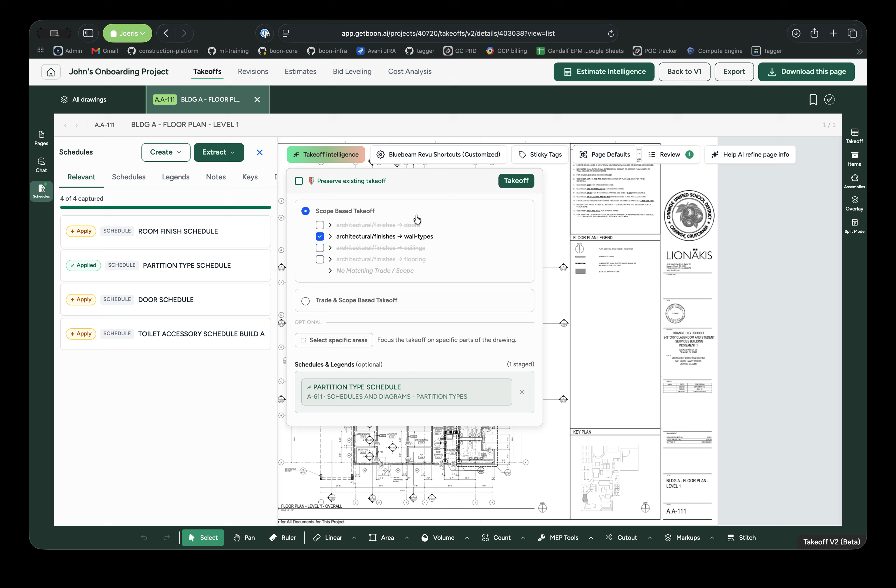Now in this beta mode, it is no longer needed for the user to draw the bounding box. That part is being automated away. So there is a note here, let AI find the wall label for you. They always have the option of drawing it if they want to do it the old way, but now they also have an AI assist.

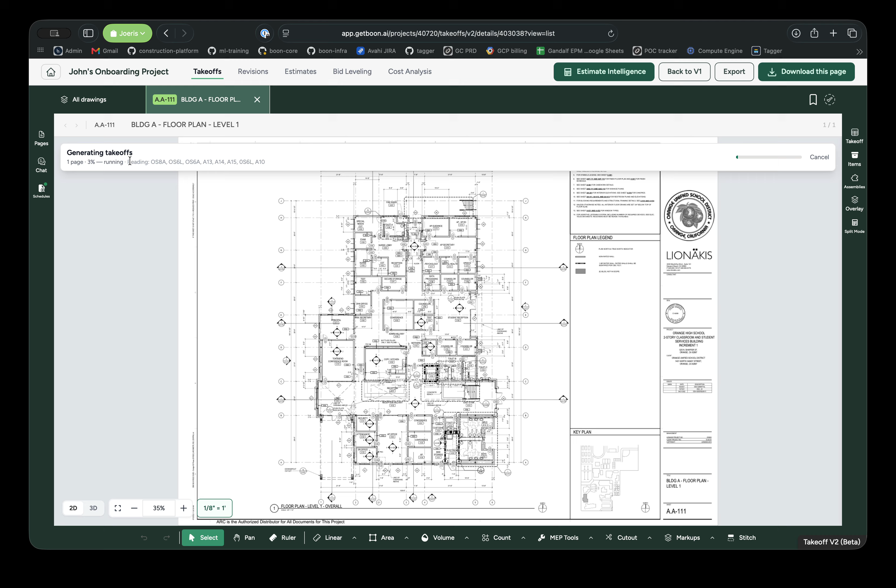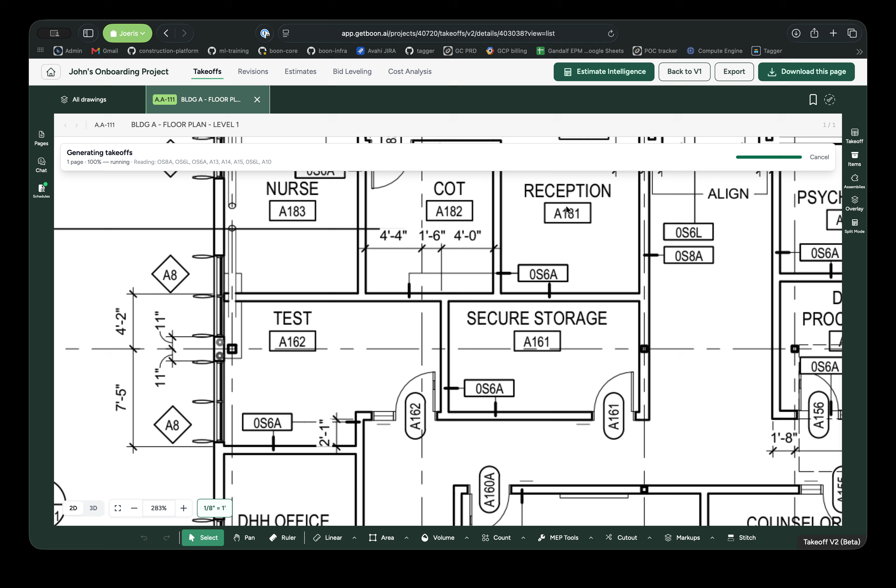And the cool part about this AI assist is how the user now gets feedback about, is it reading the right kind of wall labels? So in addition to the percentage progress, let's say 3% running, it also informs what labels AI has detected. So here it's saying it's reading 0S8A, 0S6L. As you can see, these are some of the labels that it has correctly identified, 0S8A and 0S6L. And that gives the user confidence and feedback while the takeoff is running that the AI is picking things up.

All right, so you see the walls takeoff. It was pretty fast. We've also improved the speed of it. And as you can see, a lot of them are now correctly assigned.

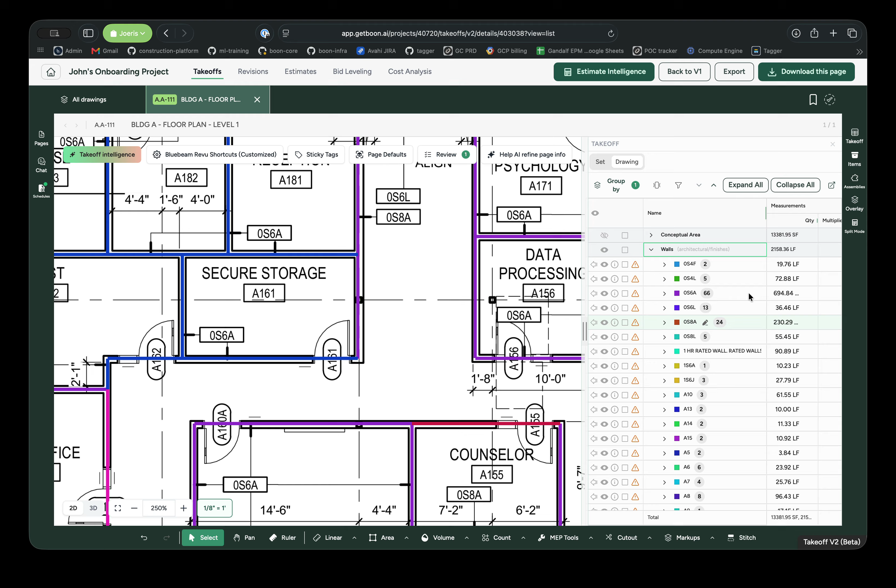So first off, the segmentation itself is very complete. So there are no missing segments, even small segments, small walls like this in rectangular spaces. They're all segmented correctly. Even these, as you can see. So segmentation recall is almost 100%, no misses. And next comes the labels. So as you can see, a lot of them are labeled. Let's quickly look at the association as well.

Association needs to be double checked. As we saw, it did attach the partition type schedule. It did say applied here, but I don't see the columns here. And of course, this schedule didn't really have, let's say 0S4F, it didn't really have any materials, but it had a sill column. And I don't see the sill column here.

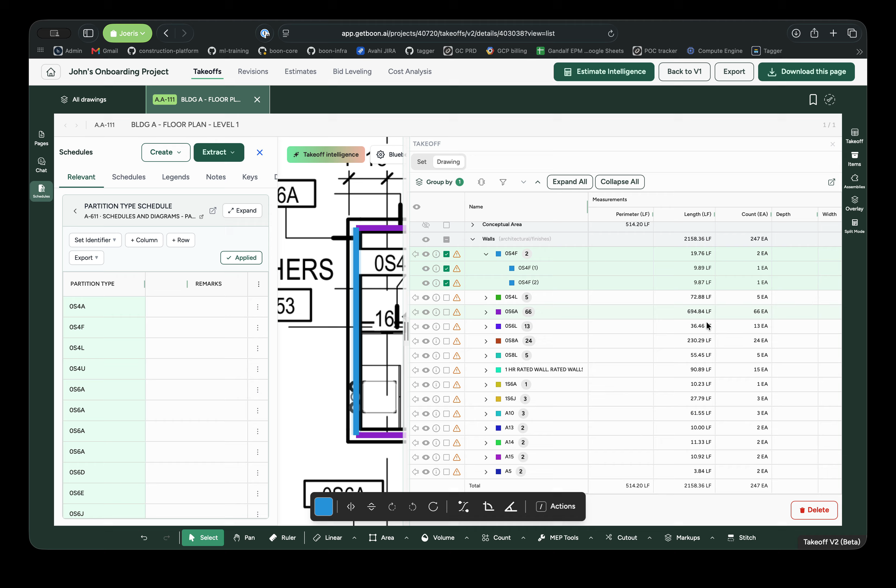Oh, there we go, actually. My bad. We have the sill column and we have the label classification. So everything has been correctly identified and associated. Awesome. Let's look at a few of these labels. So 0S4F is the one we are looking at right now.

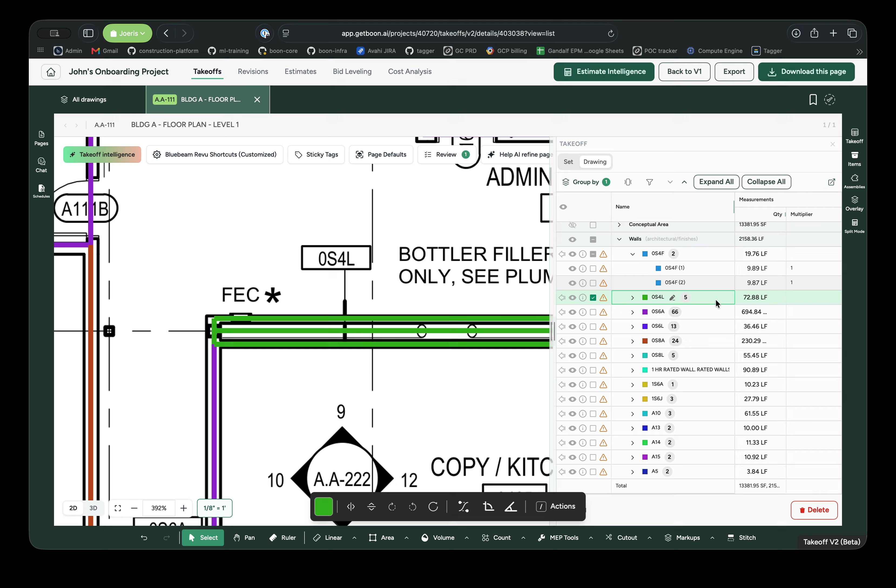0S4L is correctly this. OS6A is a vast majority of them. Yeah, as you can see, this purple one, OS6A, sorry, 0S6A, all of these.

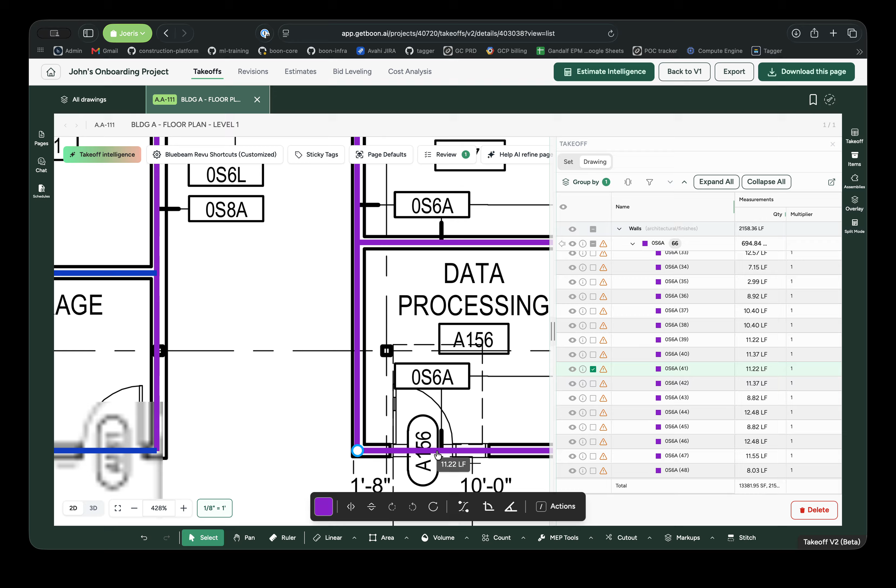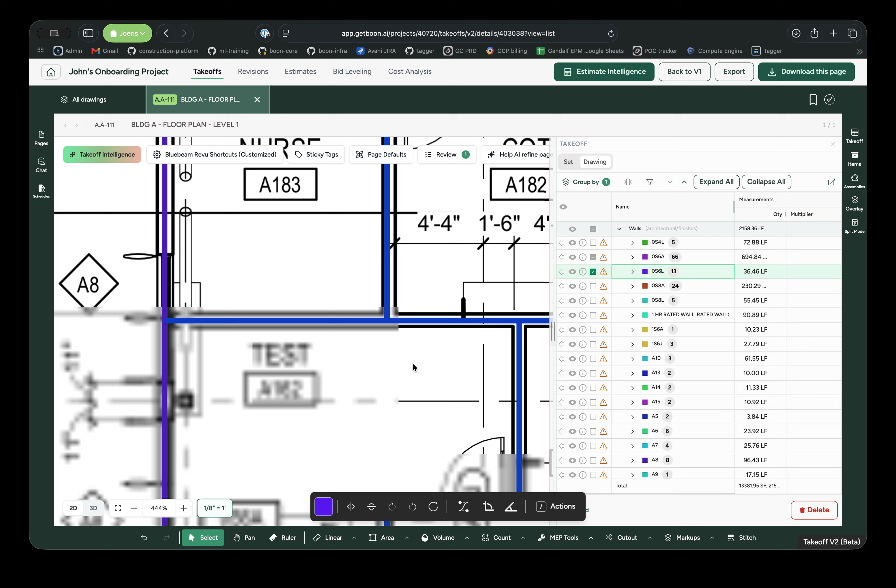Let's move on to the next one, 0S6L. Where is this? Okay, somewhere here. I think we should improve the pan and zoom a little bit on the UI side. Yeah, so it's here. There we go. Really, really precise association.

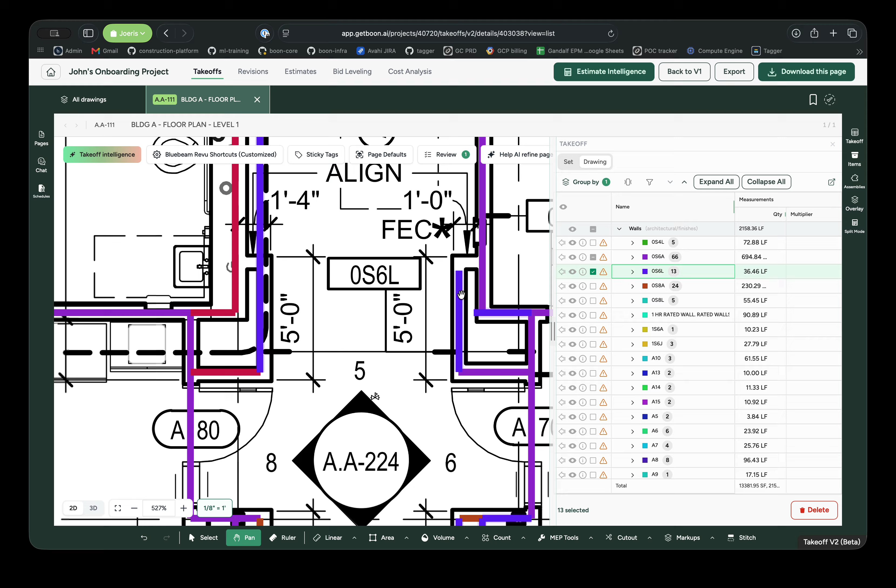0S6L, as you can see, this is really tricky. It is a leader line that comes here and then splits into a T shape with two leader lines on each side of it. So what the AI needed to do is associate it with OS6L here as well as OS6L here, which you can see it has.

Then the next ones are OS8A, also correct, as you can see here. OS8A are these red ones.

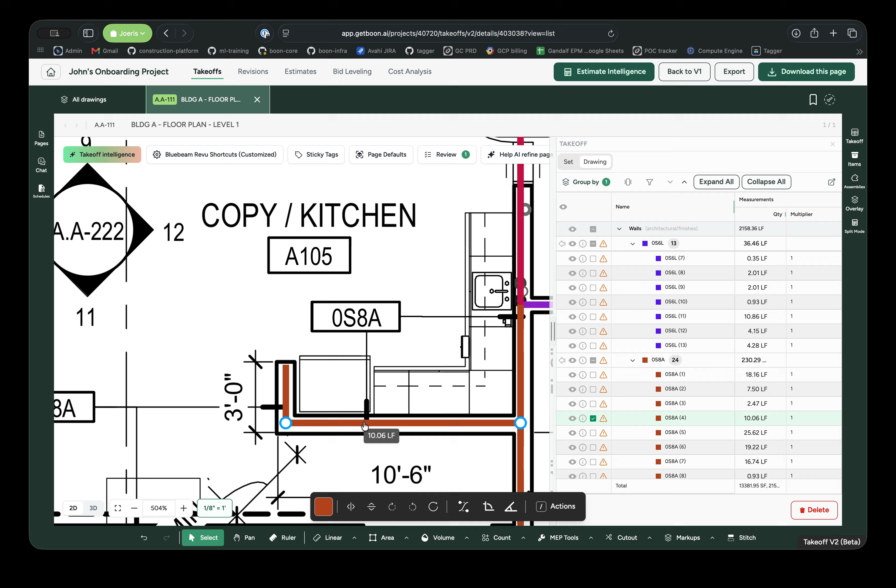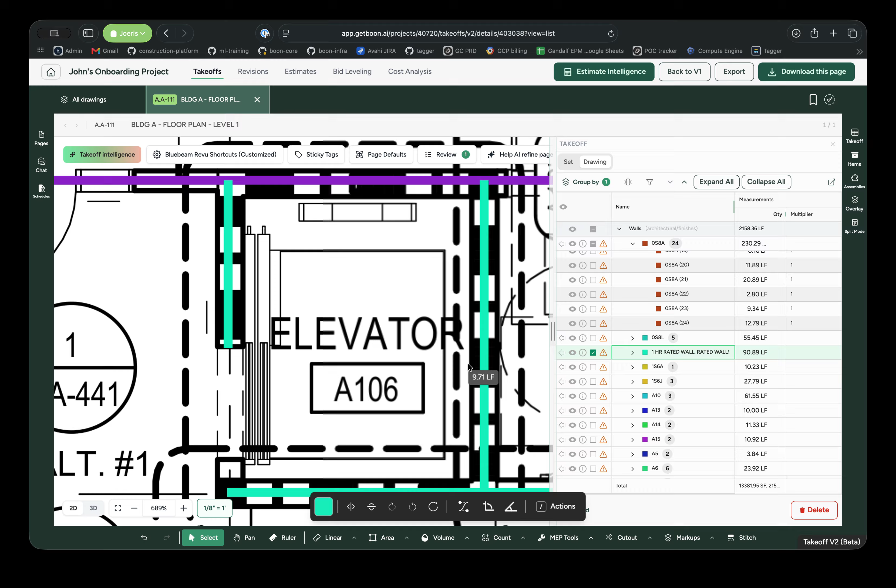Let's keep going. The great part is we also now added pattern based detection. So this has a 1 hour rated pattern here, this dashed dot line for fire rating. Now there's a consistent way in detecting the fire rating, instead of all sorts of mishmash of phrases. This is the fire rated wall, correctly identified because of the underlying pattern. As you can see, it matched the fire rating.

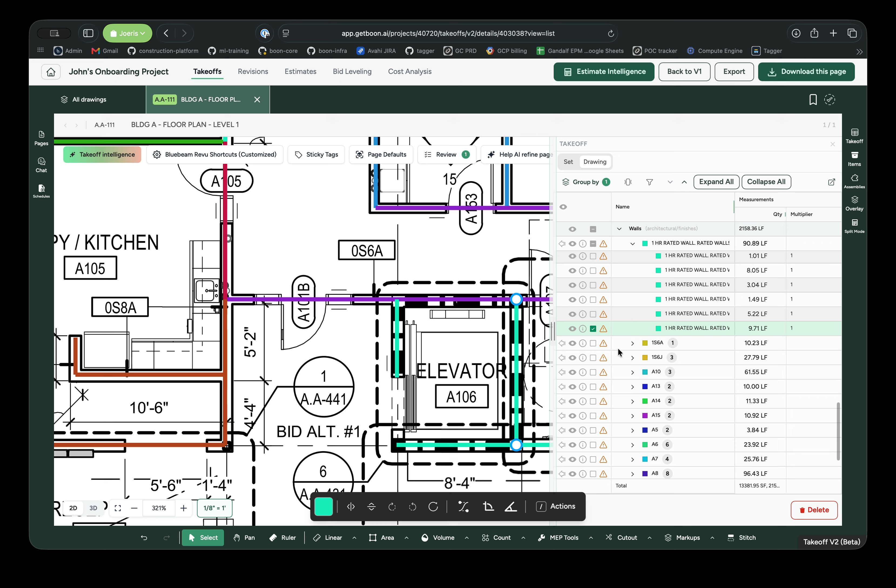And this one had no label, right? No label, only the pattern. So it's identifying the correct pattern as its requisite label.

And I can keep going. So this one is 1S6A, 1S6, 1S6J. Okay, let's look at 1S6J. Yeah, 1S6J. Here is maybe this one. Yeah.

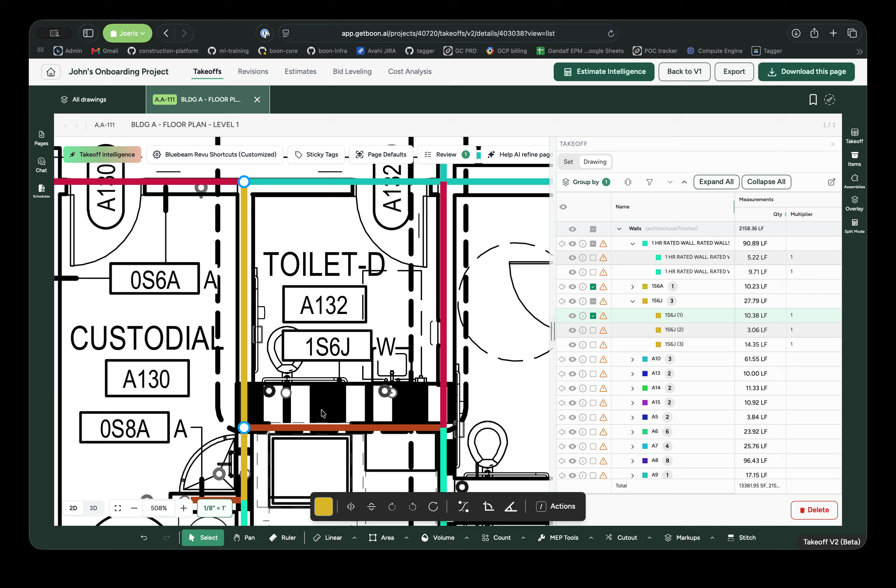A lot of non-rated walls, again going back to the pattern-based matching, non-rated wall. So regular walls that did not match anything, did not match a fire rating, are of course marked as the non-rated walls. And very few unassigned. That's our goal here.

So if you look at the overall number of walls, or look at the overall linear footage, that's what matters. Linear feet, 2000. And we have significantly brought down the number of unassigned to a mere fraction, 14. Everything else gets correctly assigned.

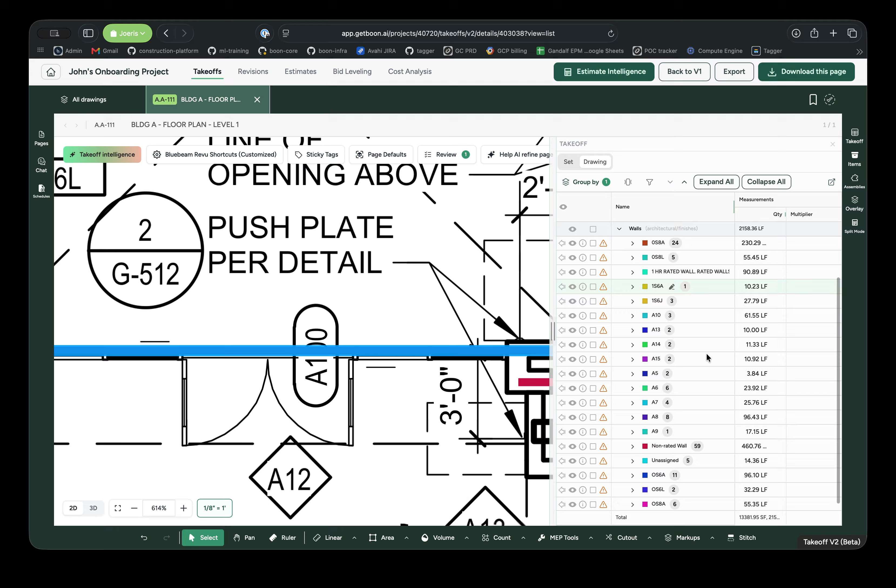So correctly, none of the doors got misassociated. There are no A100s here in the entire list of labels. So that's great, no false positives on doors.

Windows, on the other hand, the standard shape in most drawings are hexagons. This is an anomaly where this shape is a diamond. So the association agent is actually identifying and removing windows that are hexagons correctly. But in this case, this is an edge case that it associated this wall.

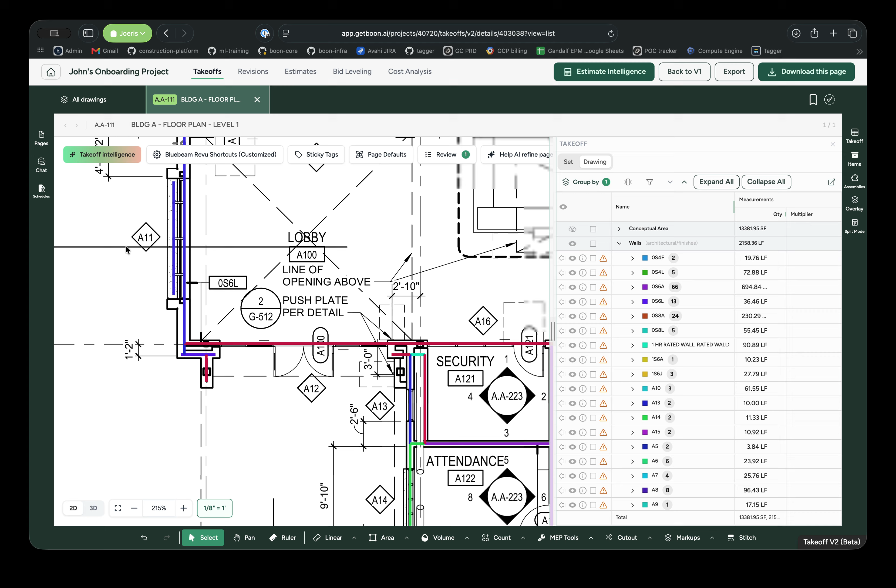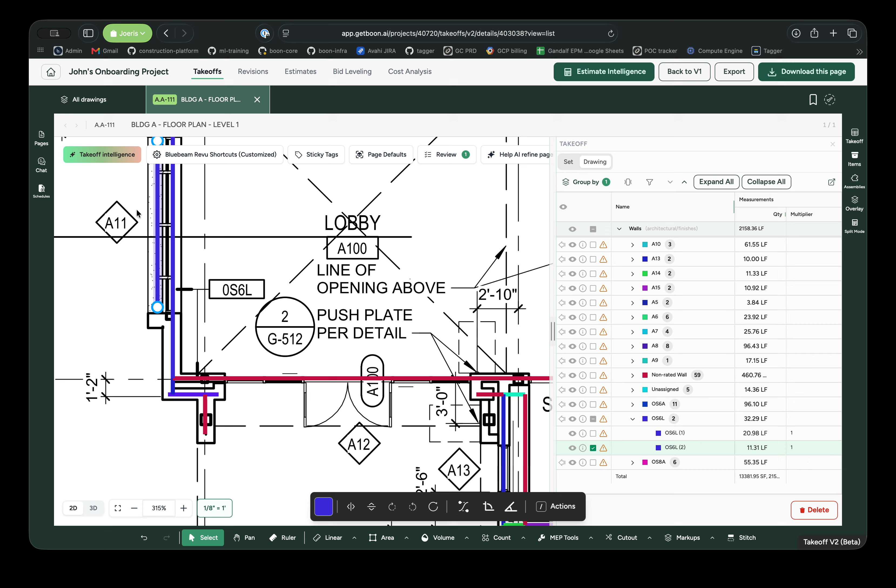Yeah, this is actually correctly associated, 0S6L. Very good. To the right wall label, it did not associate it wrongly to this window label, even though it's equally close. So let me pick one of the other examples.

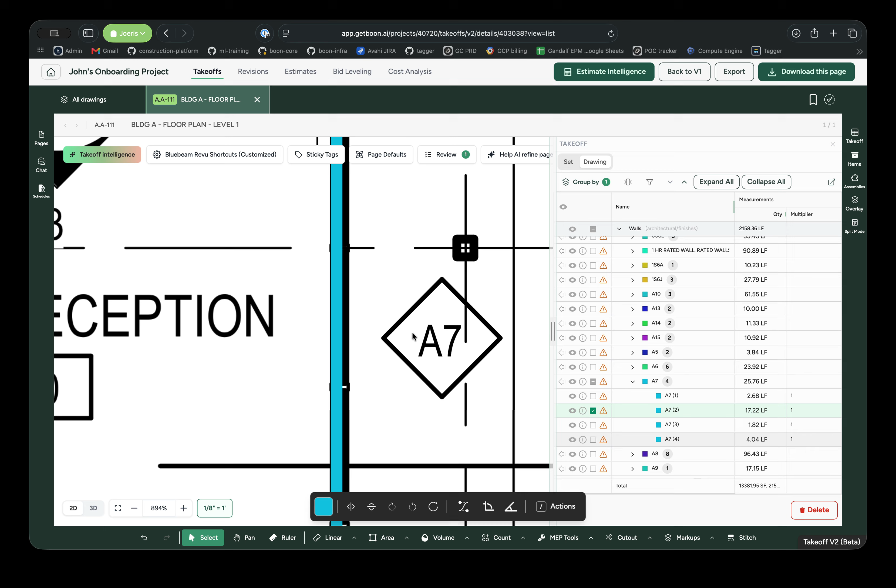A7. Okay, so this was some of those 2-3% of edge cases now where this is not actually a wall label, but it associated this to it. So it could be a window like this A6 one at the bottom, right? And we got some A6s as well.

So it's now just a matter of very simple prompt tuning to instruct it like, hey, windows can also be diamonds, not just hexagons. It's as simple as that. Add it as few shot prompting to remove those as false positives.

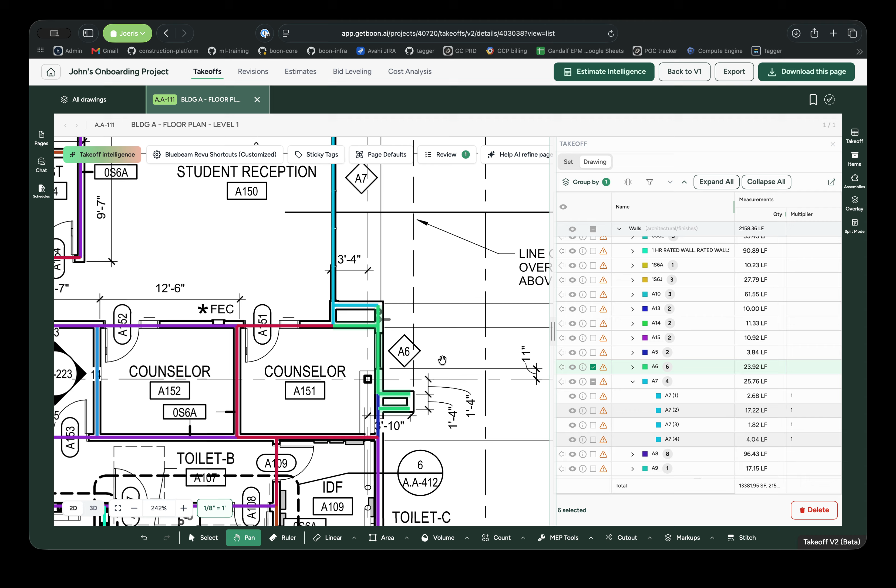But as you can see now, with wall accuracy, we are ready to start testing more and more, start putting it in front of our customers, and working towards our GC goals. Thank you.